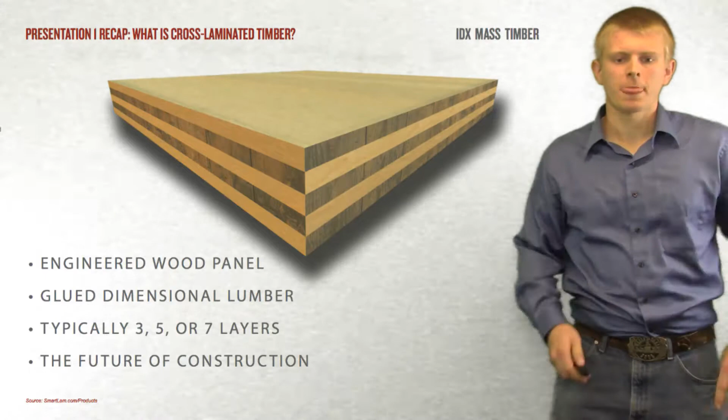In our previous presentation, which you might not have seen, we discussed what cross-laminated timber is. It's essentially a wood panel similar to plywood, a dimension lumber where the grain in each layer is crossed, so the grain is perpendicular between layers. The number of layers can vary depending on structural need.

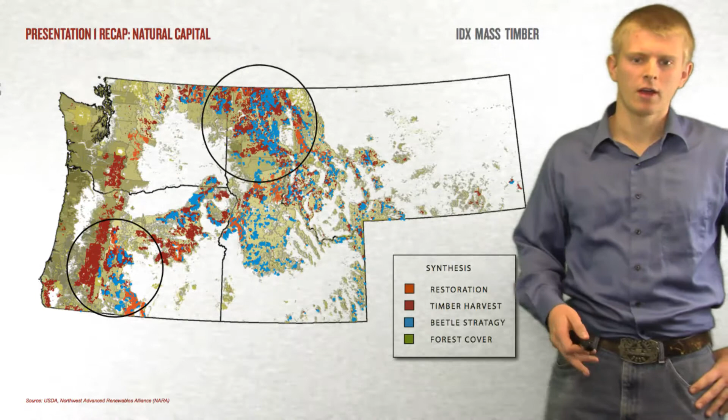Also in the previous presentation, we covered some of the natural capital in the Pacific Northwest, in this four-state region of Washington, Oregon, Idaho, and Montana. We looked at what areas have been affected by fire, by beetle kill, and where the forests are, how dense they are, and what species are there. Two areas of particular interest are eastern Washington and Idaho, as well as the western Oregon region.

For this presentation, we're going to look further into that geospatial analysis of the four-state region. After that, we'll look at characterizing some baseline buildings, be it warehouse, multifamily, mid-rise, high-rise, or large office, and examine the material requirements for those, along with specific loading and other concerns for each.

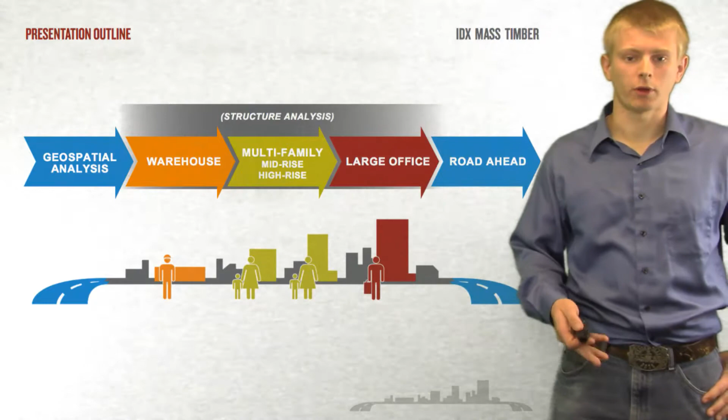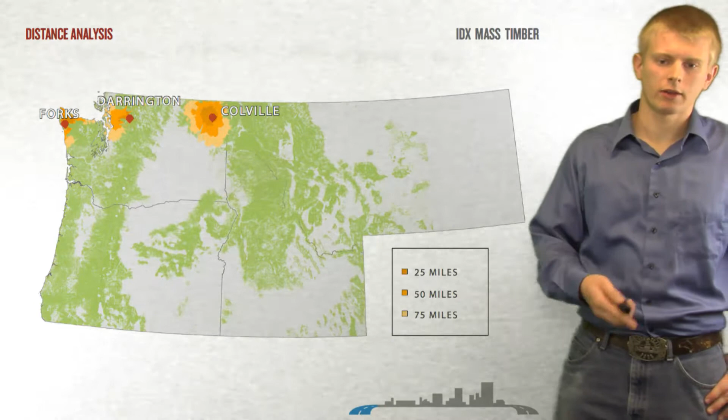Here are three industry partners located in Forks, Darrington, and Colville, and this is the distance analysis, kept in orange for simplicity. The darker regions can be reached within 25 miles of each location, then a 50-mile radius, and a 75-mile radius. This shows what can be reached from each location, along with some forest cover for perspective.

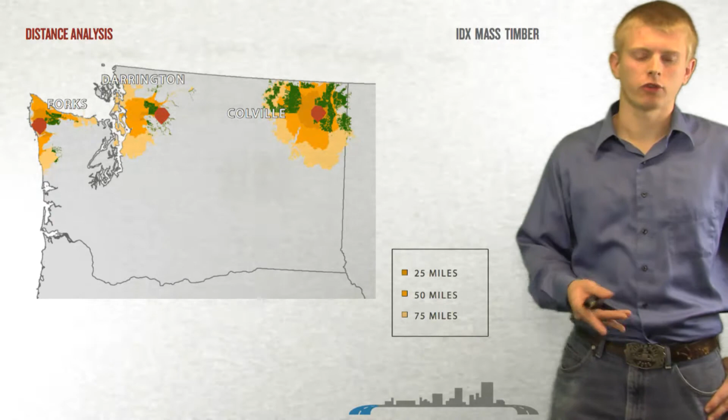We then clipped specifically to Forest Service ground. In dark green, that is harvestable Forest Service ground within a 75-mile reach of each location. Then we did the same thing for time.

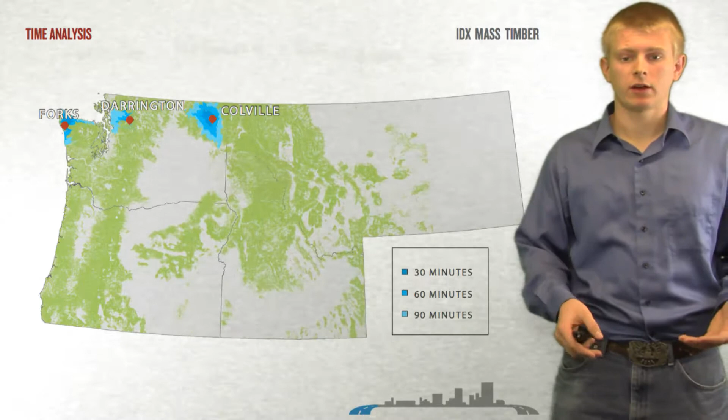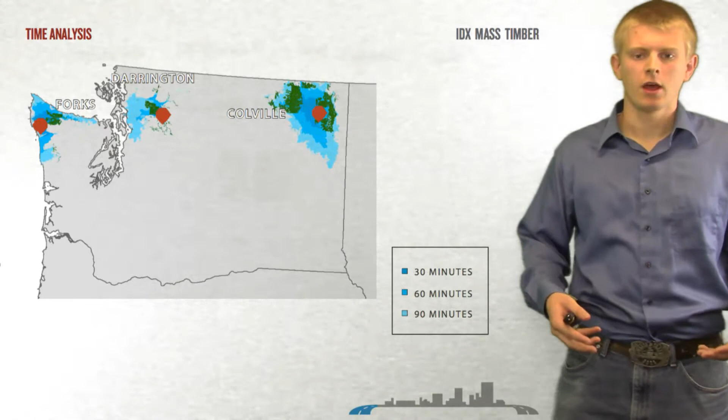We got the polygons the same way, but notice these shapes are a bit more stretched out. This is because roads have different speed limits, so the distance you can cover varies more by road type. Where it branches out, that's the faster speed limit roads. Then we clipped it to what Forest Service ground can be harvested within a 90-minute drive time of each location.

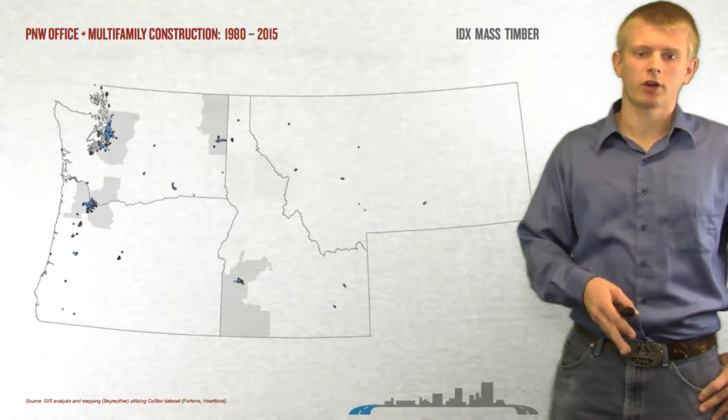Another thing I want to look at is some market analysis that was done. This shows construction of office and multifamily in the Pacific Northwest from 1980 to the present. And as you can see, once again, Seattle clearly dominates the area, Portland coming in second, but we want to focus on Seattle for the reasons as you can see in this graphic here.

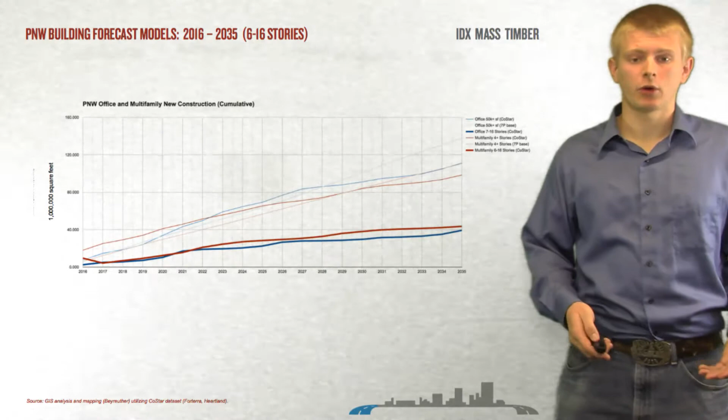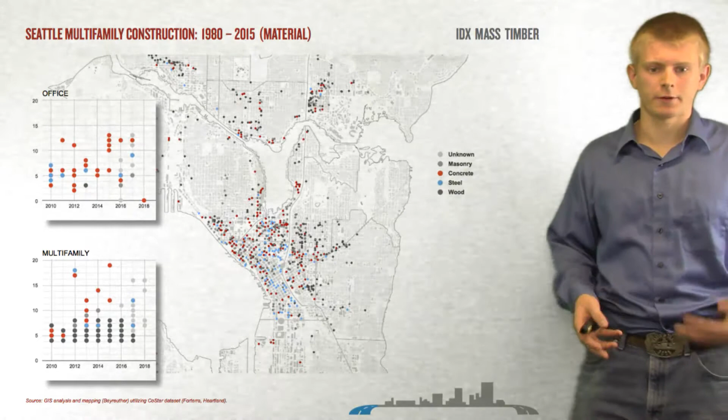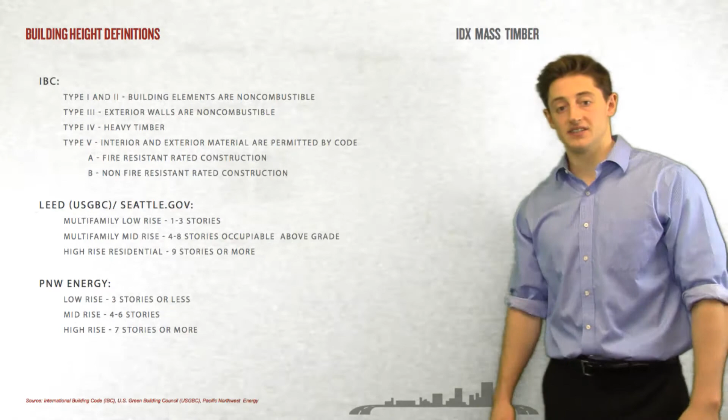Now I'd like to hand off this presentation to John, and he will discuss how different building types are defined. So before we can start talking about defining all of our different building types for this project, we need to look at how different organizations define building types. So here I have a list of the IBC, LEED, Seattle Government, and Pacific Northwest Energy. But this is kind of confusing. Every organization defines them slightly differently. So in an effort to stop that confusion, we've created this graphic.

So here you can see the IBC, and they have a threshold at 75 feet. Anything below 75 feet is considered a low rise, and everything above 75 feet is considered a high rise. And this has to do with fire. There's a fire truck in this image, and the maximum height for the fire truck ladder is 75 feet, and that's why they make that break there.

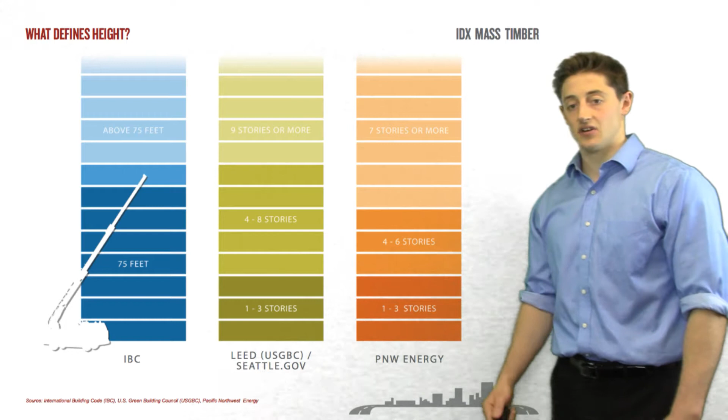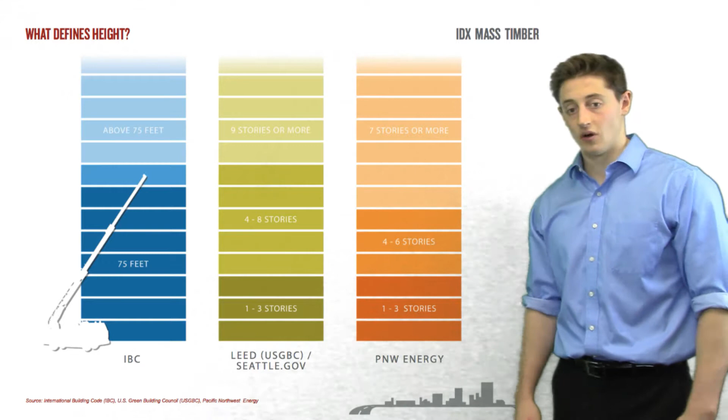If you look at LEED and Seattle Gov, we have 1 to 3 stories is a low rise, 4 to 8 stories is a mid rise, and 9 or more stories is a high rise. If you look at Pacific Northwest Energy, we have 1 to 3 stories is a low rise, 4 to 6 stories is a mid rise, and 7 or more stories is a high rise. For our presentation and for the rest of this project, we're going to be considering the Seattle.gov version, and that's because we're looking at our baseline in the Seattle area. So we chose to have 1 to 3 stories as a low rise, 4 to 8 as a mid rise, and 9 or more stories as a high rise.

So now to get started developing our baseline for warehouses, we noticed 2 big trends when we first started to look into warehouses. The first trend is that across the United States, warehouses aren't being refurbished anymore, but they're actually being torn down and rebuilt. And this is one of the reasons that we chose warehouses, because there's a lot of warehouses being built right now. And so there's a lot of opportunity for CLT to be a warehouse building material.

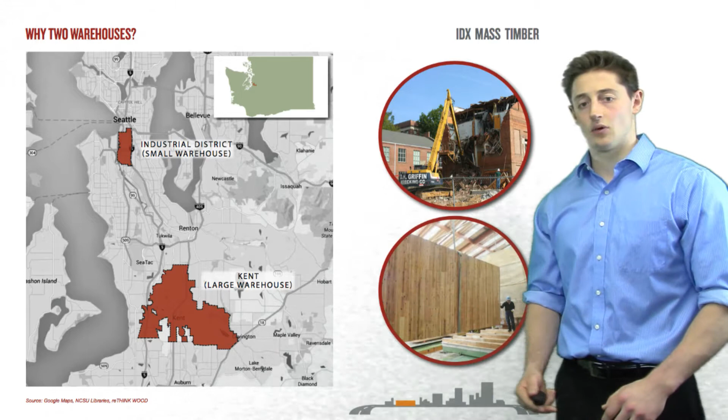The other thing we noticed is, like I was saying earlier, that we're looking at the Seattle area. And when we started looking in the Seattle area at the current warehouses that are there, we noticed that there was a big size discrepancy. There's really big warehouses and there's relatively smaller warehouses. And what we came up with is that warehouses in more of an urban setting, like the industrial district here that we have highlighted on the map, they're smaller warehouses.

And that's because they have restrictions like block size, and the general cost of land in an urban setting is a lot more expensive. And then if you look in more of the Kent area, which is in the lower part highlighted, warehouses get a lot larger, and that's because they don't have those same kind of restrictions like block size and relatively expensive cost of land.

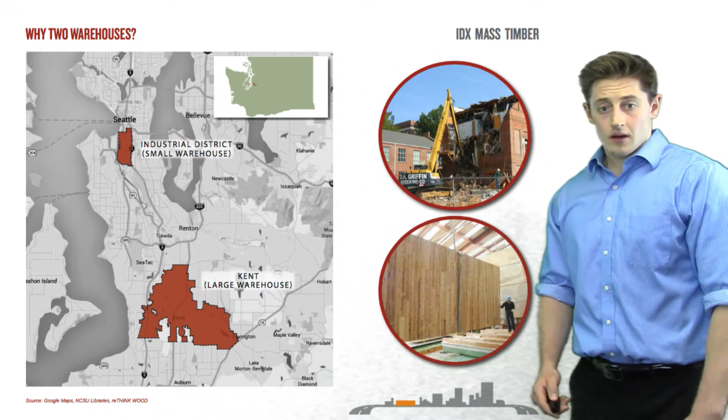So what we ended up defining our warehouses to be is: we defined the small warehouse to be 280 by 147 feet, and our large warehouse to be 630 by 294 feet. And we compared this to a football field here. The small warehouse is about 1 football field, where the large warehouse is about 4 football fields. And for the height of both warehouses, we're making it 40 feet tall. And that's because there's been a new trend recently that warehouses are getting taller, because they're getting more automated.

And by automated, I mean robotics are doing a lot of the work inside the warehouses, and so they can access really tall shelving systems, and it's not an issue. And so that's the reason for that 40-foot height.

When we started to take a look more at the structural components of the warehouse, we realized that one of the big defining factors on the day-to-day operations of a warehouse is where the column spacing is compared to the racks. And so we chose a very average rack size of a rack depth of 3.5 feet, a flue width of 2 feet, and an aisle width of 12 feet. And based on this equation here, it gave us an optimal column spacing of 21 feet. And so we wanted to put our columns at that spacing.

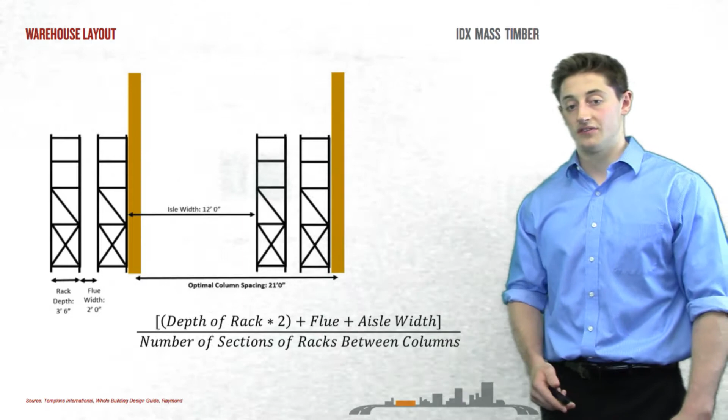Another important part about developing the layout for a warehouse is we want to make sure that we're using materials efficiently. So we're going to build our roof out of 3-ply CLT panels. And so we looked at what the maximum span for those 3-ply CLT panels is with our roof loads on them. And we determined that it was just over 21 feet, which led us to create this general layout.

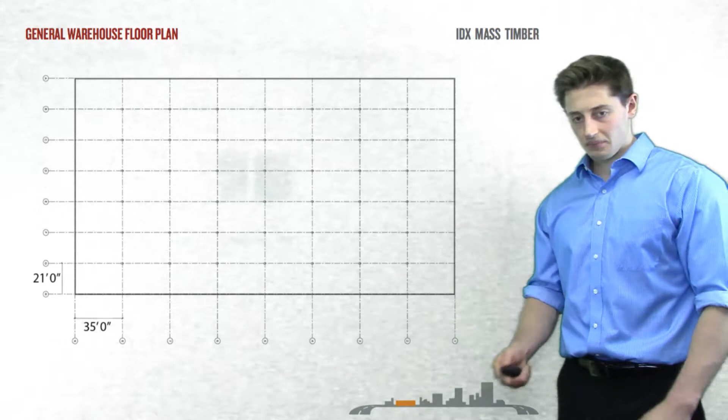This layout here is for both the large and small warehouse, but specifically this one is the small warehouse. The large one is just on a bigger scale. So we're spanning columns at 21 feet here, and we're having a glulam beam span at 35 feet between each column. And then we're going to lay up our CLT panels from beam to beam on that layout. So that's our general floor layout.

Here's a 3D rendering of our small warehouse, and what we're going to do for this is we had 5-ply CLT panels for all the walls and 3-ply CLT panels for the roofing. We took out a wall here so you can see the interior of the building. You can see all the columns and beams, and we're going to use glulam for that.

Something you'll notice about this building is that there's no lateral bracing, and this is true for both the large and small warehouse. And that's an assumption that we made based on our wind load calcs because the CLT panels are really strong in in-plane shear. The total volume it would take to create this small CLT warehouse would be 960 meters cubed, and the total volume of CLT it would take to create the larger warehouse would be 3,000 meters cubed.

So now I'm going to hand it over to Nicole, and she's going to talk about some of the general assumptions that we used in developing the rest of the buildings for this, as well as start talking about our definition for mid-rise.

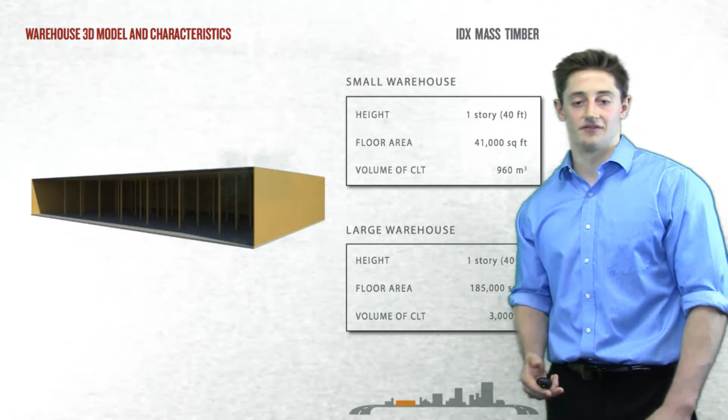So as mentioned previously in this presentation, we are looking to determine the total volume of CLT needed for each of these different baseline buildings. So to do that, it's important to note some of the general assumptions that went into developing these baseline buildings, specifically the mid-rise multifamily, mid-rise high-rise, and large office building. In order to analyze these buildings, we considered gravity loads only. That being said, we did not consider lateral loading or the effect of fire.

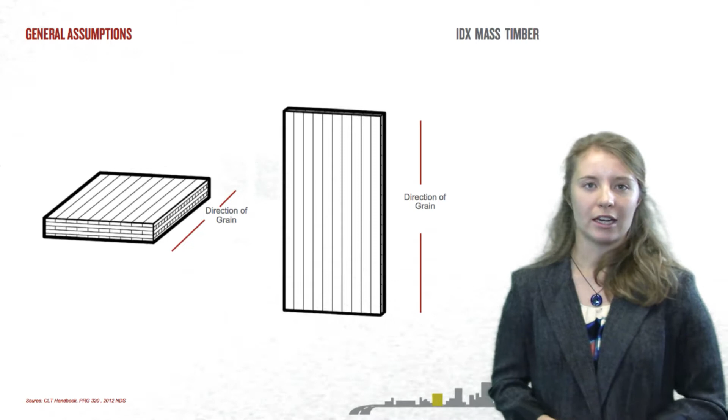We assumed that gravity loads without a live load reduction would give us a conservative estimate for the volume of CLT demand for each of these buildings. As you can see here, the vertical CLT member you see is analyzed as a column, as a wall. The horizontal member you see here would be a floor, analyzed as a bending member.

This slide illustrates some of the common gravity loadings we have used to analyze our buildings. You see here the 9, 7, 5, and 3-ply CLT members, as well as their corresponding pounds per square foot. Some common building materials we used were concrete, insulation, roofing, and it's important to note that we assumed a mechanical loading of 2 pounds per square foot per floor and a partition wall loading of 5 pounds per square foot per floor.

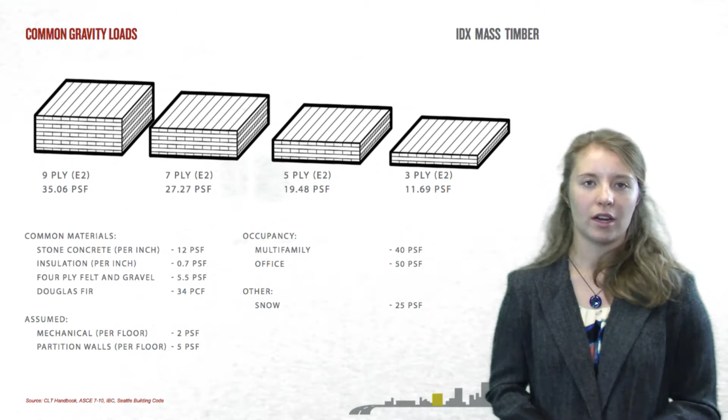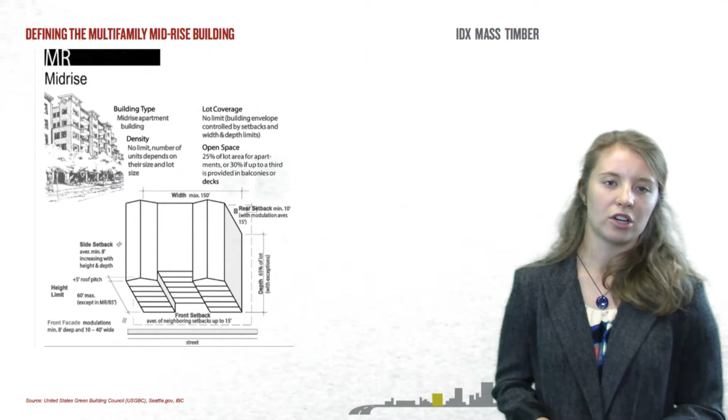So for the multifamily mid-rise building, Seattle code requires that these buildings hit a capacity of 60 feet, or in some mid-rise 85-foot zones, 85 feet. The width of these buildings is limited to 150 feet, and so this zoning requirement that you see here was used to illustrate our multifamily mid-rise building. As mentioned, we are looking to compare the Type 5 over Type 2 building.

Again, it's noted that Type 5 over Type 2 is limited to about 75 feet. This is due to the code restrictions on light frame timber. So that 5-story limit on light frame timber is going to limit this building to about 75 feet, which doesn't use the full capacity of that mid-rise 85-foot zone.

So instead, we use 7 floors of CLT over 1 concrete podium. The CLT floors would be floor-to-floor heights of about 9 feet 4 inches, and that concrete podium would be about 15 feet floor-to-floor height. This puts us right at that capacity of the mid-rise 85-foot limit.

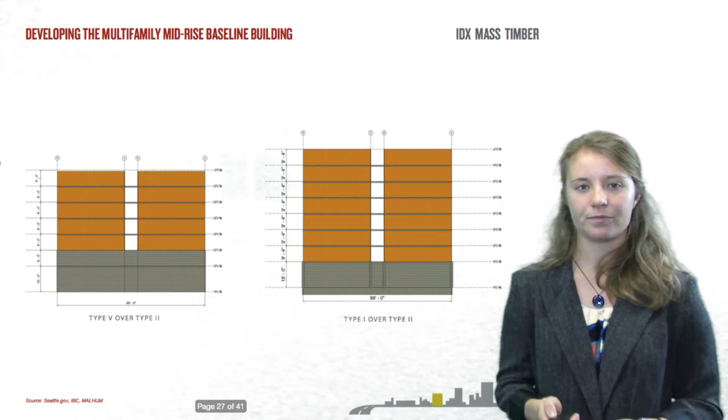Going into the deeper analysis of this building, we start to develop a floor plan. So first we looked at the slabs, and through our analysis, we determined that a 5-ply member could span about 16 feet with vibration governing. That being said, the next step was to look at shipping and feasibility of getting that span length onto site. We realized that shipping lengths usually standardize about 48 feet before going into the complications of oversize shipping. So we wanted spans that evenly went into that 48-foot limit, so 16 was an adequate span length.

Next thing was to check that our walls could handle the tributary length for the loading coming down on them. We analyzed different members, 3-ply and 5-ply. A 3-ply was determined to support about 34,000 pounds per foot width. This is including a column reduction factor of about 0.6. The demand on the second floor, having the greatest demand for our CLT there, was about 7,500 pounds. So the 3-ply was clearly adequate for all floors. Again, we didn't include fire in our analysis, so it is noted that later this may bump up to a 5-ply with deeper analysis.

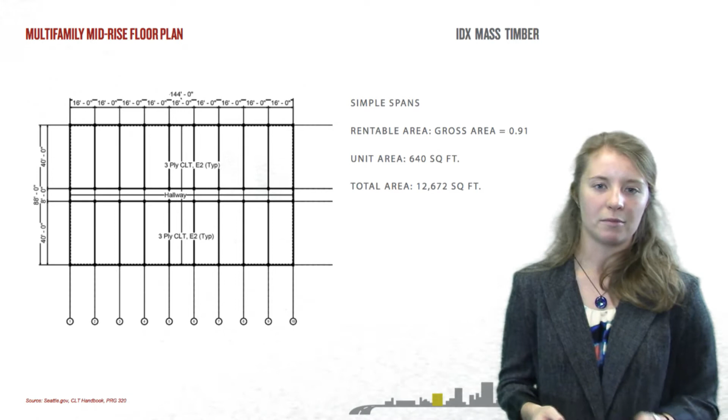Finally, we have our 3D rendering of the multifamily mid-rise building. Exterior walls and roofing are excluded in order to allow you to get a deeper visual of the bearing walls and floors that you see here. It's important to note some of these side values over here that illustrate some of the specifics of this building. Most notable is the demand CLT. We have a total volume of about 83,000 feet cubed, as well as 2,400 meters cubed. These values will be compared to the other baseline buildings that you see later in the presentation.

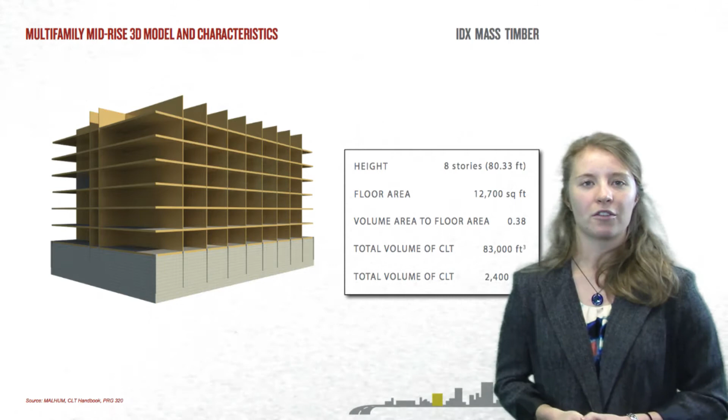And now I'd like to hand it over to Rob, who will discuss the high-rise building.

Over the last 30 years, we've seen a significant increase in the construction of high-rise multifamily buildings. In the early 80s, only about 0.1% of these buildings made up the total market. Now multifamily high-rises make up close to 5%. So this is important information for us to know because it shows a promising future for the construction of high-rise multifamily.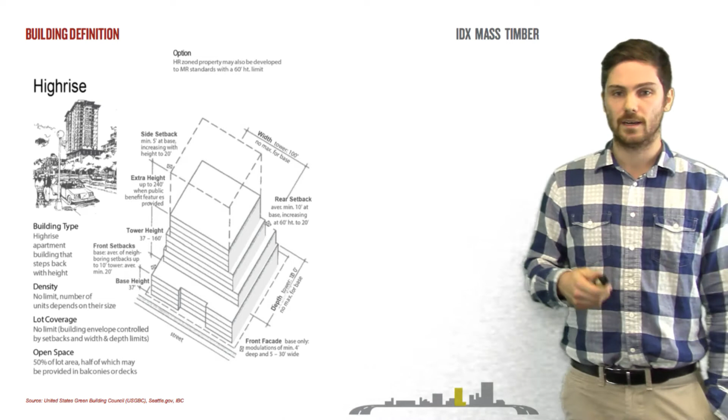The Seattle zoning code told us that in the Seattle area, these buildings had a max tower height of anywhere between 37 and 160 feet. There are certain areas of Seattle that allow this tower height to go up to 240, but looking in the South Lake Union zone, we saw that for multifamily high-rise buildings, they had a max height of 160 feet. So this was the total height that we were designing our building with, and we saw through more market analysis that the overall envelope and square footage for these buildings was not to exceed 10,700 square feet. So we wanted to make it as close to that number as possible, which leads me into our floor plan design for this high-rise multifamily.

Here you can see that we have 10 family units, 5 on each side, separated by an 8-foot corridor. The dimensions of each unit are 40 feet by 24 feet, giving an overall dimension of 88 feet in width and 120 feet in length. This gave us an overall area of 10,560 square feet, which got us really close to that 10,700 mark we were shooting for. The reason we want this maximum amount is to give an overall maximum amount of CLT that might be used for one of these buildings.

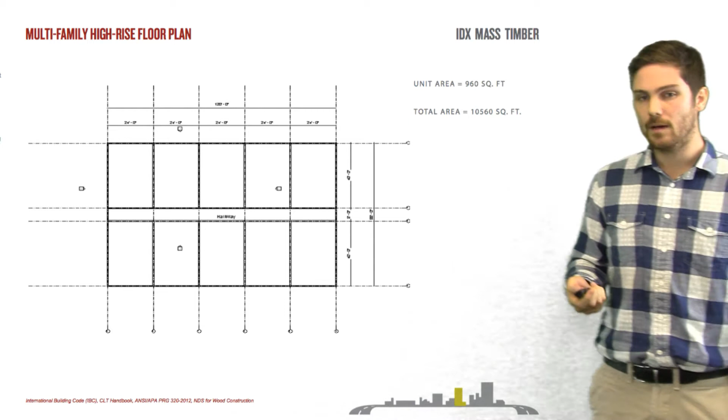But as Nicole mentioned, there's a 16-foot governing factor due to vibration. Vibration didn't allow us to have spans greater than 16 feet. Because of this, we have to use composite action. Composite action pretty much utilizes the materials of concrete and wood. Here we have 3 inches of concrete over a 5-ply CLT panel. As we know, concrete is best when it's in compression.

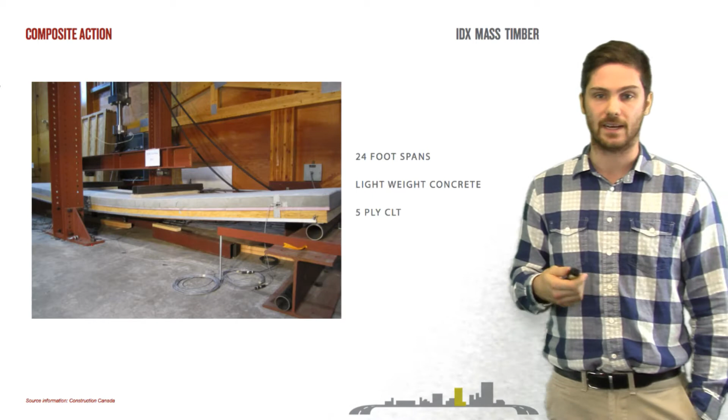Its strengths and properties when it's in tension aren't that great. And likewise for CLT or wood, the strengths of it are when it's in tension because it avoids issues of buckling. So because of that, we're now utilizing the compressive strength of concrete and the tensile force and strength of the wood, which allows us to get the 24-foot spans as you saw in the floor plan before.

Here we have a 3D model, 3D rendering of this building. As you can see, we have 15 stories, which have a height of 156.4 feet, getting us really close to that 160-foot mark, again, maximizing and optimizing the total amount of CLT that is going to be needed for these types of buildings for comparison in the future. The total floor area, as I said before, is 10,560 square feet. The total volume of CLT for this is 140,000 feet cubed, or in meters cubed, that would be 4,000 for the total volume.

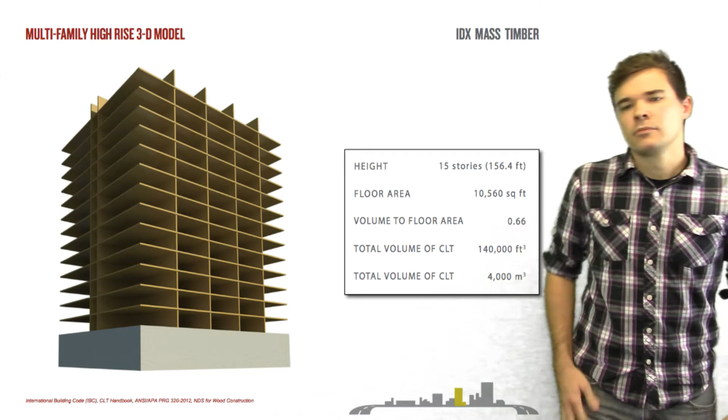What's unique about this area is that it's what's known as an urban center, so we're able to build higher buildings here as long as we can share the space with other building types. These urban centers are fairly common in growing cities like Seattle, and they're designed for this larger building height for a denser area so that it can accommodate a growing economy and a large population boom.

So here in the SM 240 region, we were able to build a commercial building to a height of 240 feet, which is a little higher than we normally would be able to build, but we then have to share that space with a 125 to 400 foot residential tower. Based on these requirements, it would not be unreasonable for us to design this model in association with one of the multifamily models that we saw in the previous slides for this region. And so that's an advantage that we have there.

Here's a typical floor plan of the large office model. We see a 102-foot span by a 240-foot length. One of the important aspects to notice here is the core, the structural core, which handles most of the gravity loads. And then we have these shear walls here on the outsides that handle the major lateral loads. And those are fairly unique for the office because we don't have the partition walls from the multifamily buildings that kind of help control that lateral force.

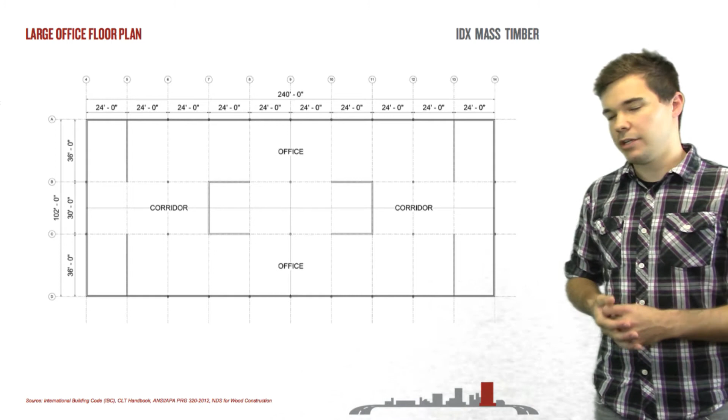Another important thing to note is the spacing between the columns here, which is 24 feet, and that's our ideal panel length, as we explained earlier, because those panels are very easy to press, very easy to manufacture, and very easy to transport. So here we have a 3D model of the office structure. You'll see that it's 18 stories tall. 2 of those stories are in the concrete podium here, and then the other 16 are primarily CLT.

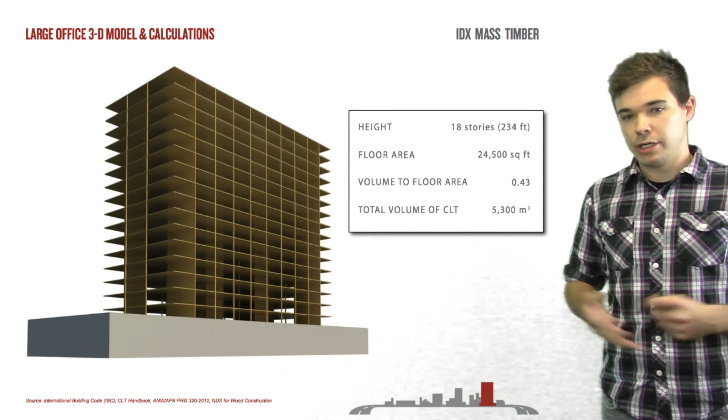And so we have a total height of 234 feet, which makes really good use of that 240-foot limit. So this concrete podium has a 15-foot floor-to-floor height, and then the CLT portion has a 12-foot 9-inch floor-to-floor height. The podium is primarily for lobby retail use, which is important in our zone, dining, loading docks and parking and things like that, whereas the upper portion, the CLT portion that we're concerned with, is primarily for office use.

So something unique about this office design, because it's so tall, is that we need to really focus on the thickness of the CLT plies that we're using in the walls. And because it's such a tall structure, we get down even to the 9-ply thickness, which is over a foot thick, which is unique to this building. The other buildings, I think, only get to 5-ply or 7-ply.

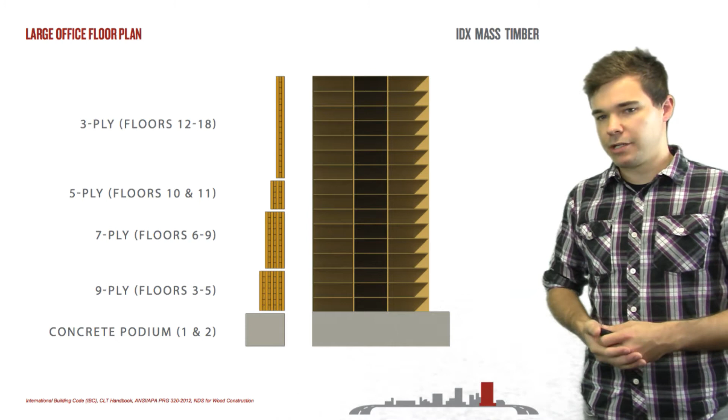So for the design loads here, to accommodate the compounding self-weight of the floors, we have 3-ply in the top 7 floors, and then 5-ply, 7-ply, and 9-ply in the bottom floors. This, of course, affects the amount of CLT that we'll need and kind of cuts our efficiency as far as making the most out of the material for the building, for the floor area that we want to use.

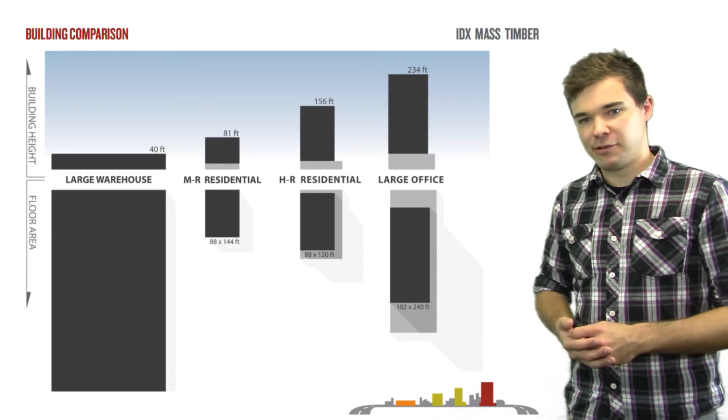So this part works. We have our total volume of CLT here. We calculated that for each building earlier, but I've compiled them here so that you can directly compare them. You'll notice that they're in cubic meters, which might be unusual to some of you. To put it in perspective, an Olympic-sized swimming pool is about 2,500 cubic meters.

So for the mid-rise residential, for example, it would be about one swimming pool worth, just filled to the brim with CLT panels. So that kind of gives you an idea of how much wood we would actually need for something like the mid-rise residential. And for all of these structures, other than the small warehouse, we would need at least that amount to build them. And the reason why we're using the cubic meters is because CLT has been more popular in Europe and Canada for some time, whereas it's fairly new in the US, so we're still using the international units just to keep with the standard.

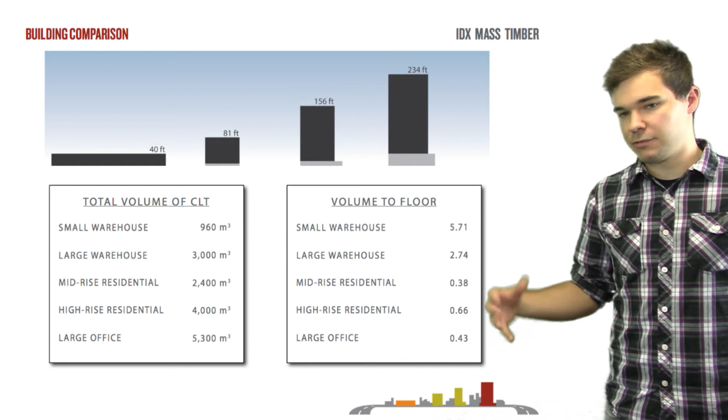You also see the volume to floor ratio for each building, which is pretty interesting and useful information because it shows us how effectively we've used the material and how well we've optimized our space usage. This is basically telling you the volume of CLT that we're using compared to the amount of floor area we're able to utilize with that same amount of CLT. So these numbers here, basically the lower they are, the better use of the space we're getting.

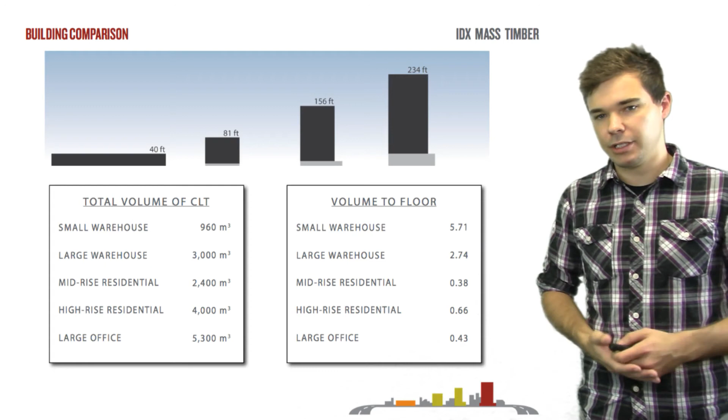And then that doesn't really apply for the warehouses because it's more of a rentable area or occupied area by residents or workers, and so it doesn't really take into account the storage, which is the primary use of the warehouses.

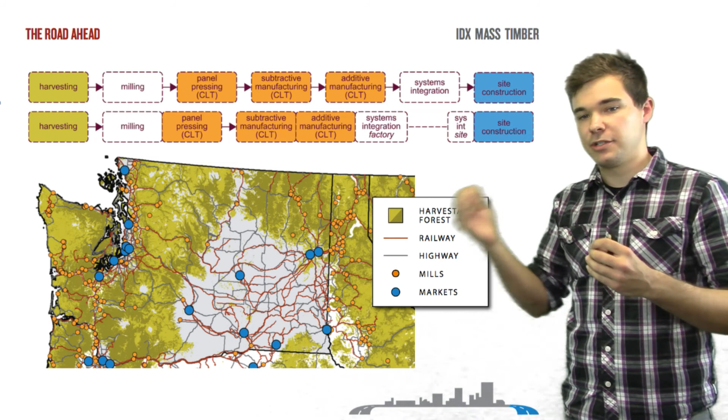The logical next step, therefore, would be to connect these two ends and really get into the meat here of this CLT production process. We can make an educated decision now based on this information we've learned on what kind of mills and factories we might potentially use to create this successful supply chain.

And then after that, we're going to come back to these structures that we've analyzed today. Starting next year, early 2016, we're going to collaborate with the University of Washington, and we're going to revisit these models and get into the more advanced designs, some of the more advanced loads, and look into some of the stricter building codes, and really get these designs ready for real-world application. So that's an exciting future for us.